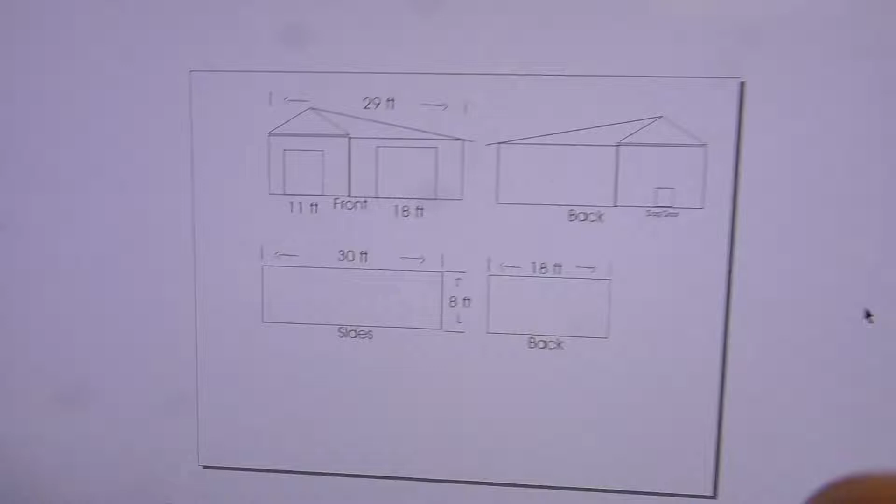I think I can make this look decent using the old shed as well. So basically, this is the old, and this would be the add-on.

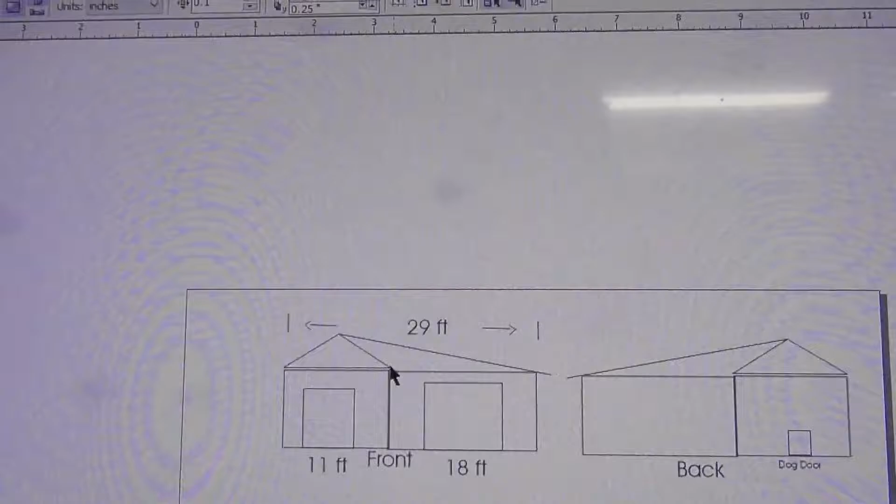I could come off the top of this roof and right across, and inside I'll have the 2x4s or 2x6s up here so that I can plywood it. But first I'm going to block this off right here, because I don't need heat going up into there and escaping. So I'll put a piece of lumber right up in there.

Let's undo that. Okay, so I'll put a piece of lumber there. Let's draw a line, going from here to there. So this will block anything from going up into there, which would just be wasted space.

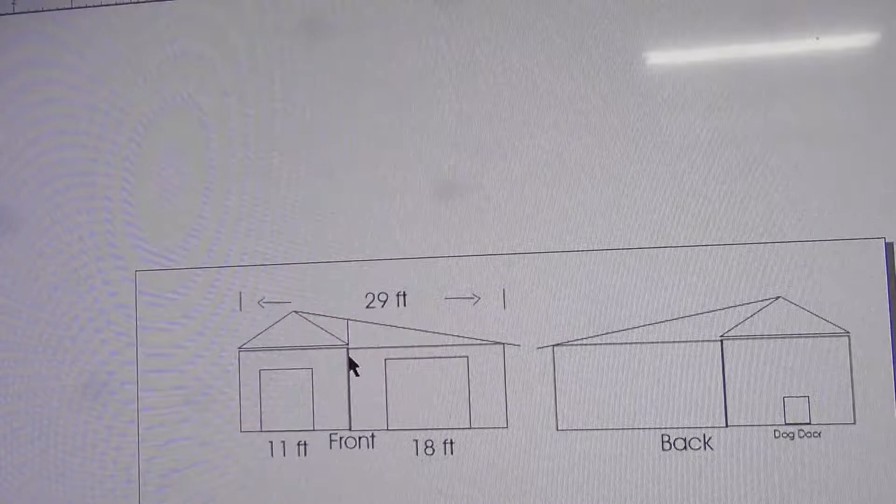I can put a couple pieces of plywood here, not to close it off completely, but to give me a place to put things up there if I need to.

This will be the front door, approximately 8 feet by 8 feet. This is the door that's there now in the old shed with the ramp, because I keep lumber in there. And this will be the back.

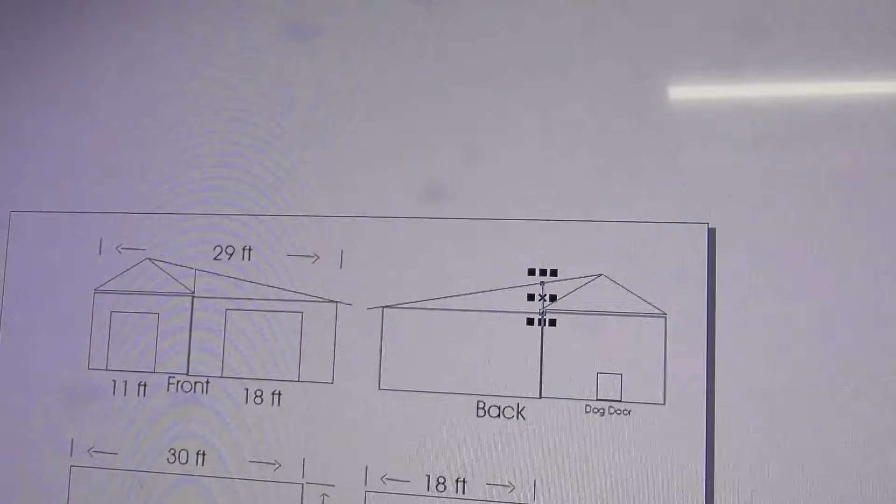Now I know because of the way this roof is that it looks like it's angled, but it's really not. This is the back. This would be the addition, and this is the old one.

This is the dog door back there, because they used to, and still do, run in through there and around and out the front. They use this as an in-out playground.

I think you guys have seen that before. I'll probably just leave that alone. There's no sense in rebuilding it, not unless I got extra lumber laying around. But other than that, that's kind of where we're at.

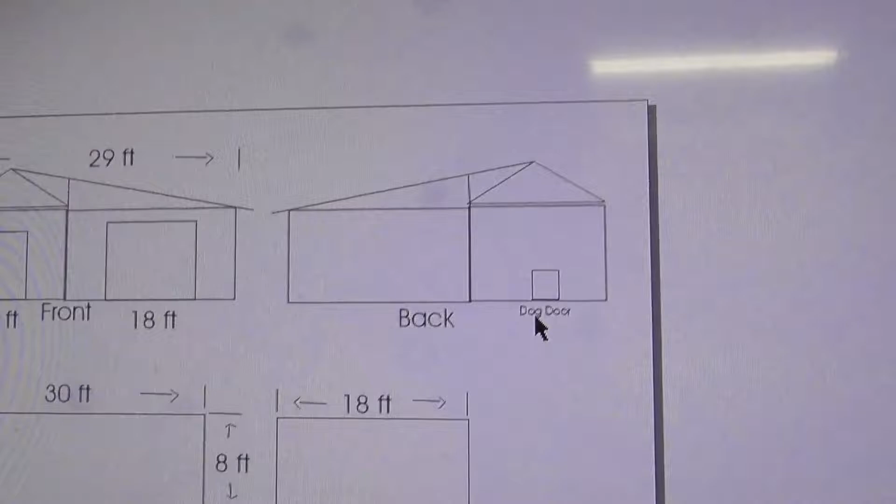So there's the back. The overall width is going to be 29 feet, and the overall depth will be 30 feet. So it's going to be 29 by 30.

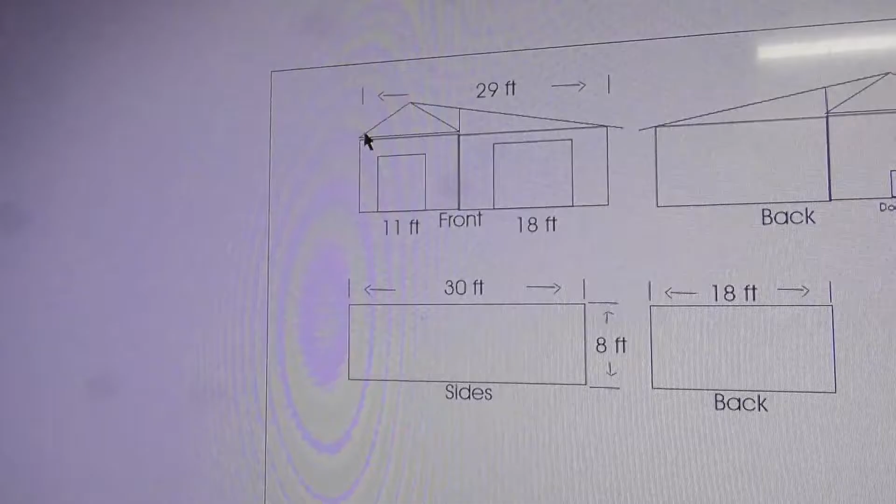But that's only on the new side. The 29 wide is the width of the whole thing, but the 30 is going to be the new side. The piece over here, the old one, is only about 15 to 16 feet long, so this one's going to be almost double that length.

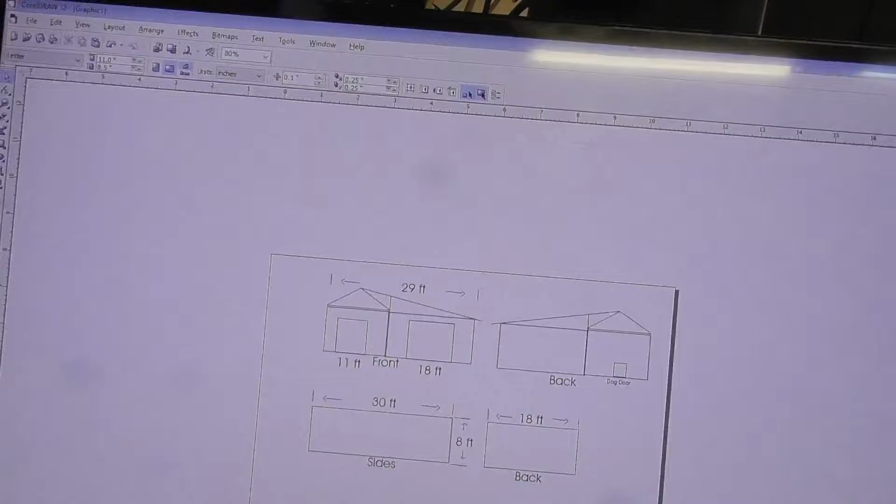So 30 feet's a lot of space, you know, so it's going to be a pretty good size back there. I just don't want it to look out of place, so I wanted to make sure that it looks like it belongs there.

So I'm probably going to have to side it with something. I can probably just put texture board up, you know, T1-11 around the outside, and have it look okay, and trim it to give it some look.

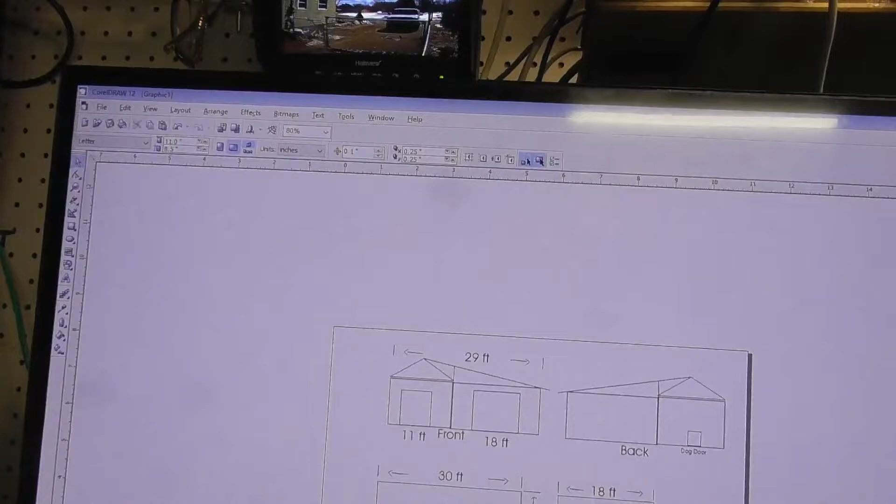Before I put the texture up though, I'll wrap it. See, I don't like, if I'm going to use texture, like for instance next door they put up texture board. I don't know if you'll be able to see it or not. I mean, it doesn't look bad, but this is the guy that's cheap, the guy that doesn't want to take care of his tree problems.

You can't see it, but right over there, there's a brown board, but that's like a little shed over there he built. It's probably 12 by 15 or so, 10 by 15, somewhere around that area. And they used the real thin texture look, texture 111 look, you know.

So it's texture 111, but it supposedly has a coating on it, so it protects the outside. However, it doesn't do much for the inside. It's basically still just pressed board, and as the moisture comes up, it's going to rot it anyway, but that's him.

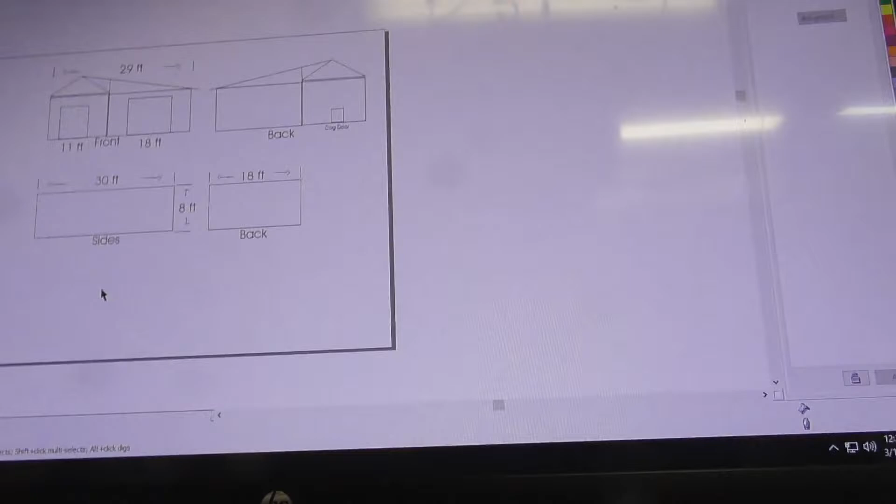I'd like to see this last a couple years. I don't want to be out there fixing it every time a winter comes along. So I'll put up an inner board, something like what I have in here, which is still nothing that I really care to use, but for what I'm doing, this stuff here.

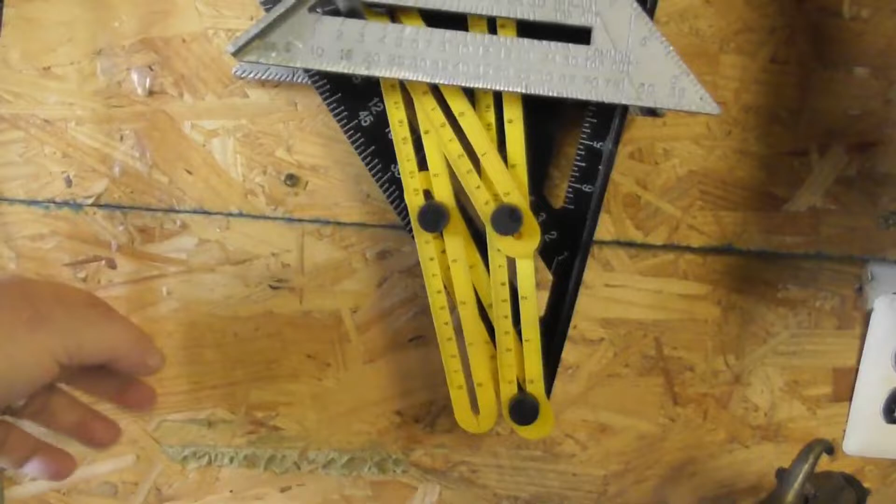Like for instance on the roof here, I use plywood. I'd like to use plywood all the way around, but seeing that I'm going to wrap it, and I'm going to have texture 111, I'm sorry, and pressure treated on the bottom.

What I can do is just seal the crap out of the bottom and then wrap it, and then I can use that inexpensive texture 111 board, or just buy the good texture 111, put it up and paint it or stain it, which is another option. So I have to kind of see which is going to be best.

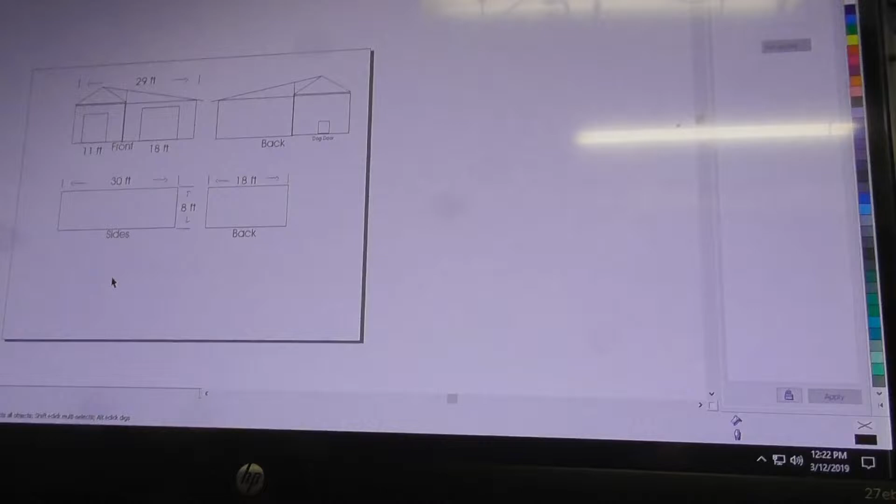Wrapping it will help hold the heat in, and I have the wrap, but again, seeing that it's not going to be a full-time thing, it isn't something that I really have to concern myself with. But that's where we're at so far, so we'll see what happens.

I'm going to go on Home Depot's website real quick and see what some of these prices are, and that'll determine if I want to use a double wall, meaning this particle board stuff first, then wrap it, and then put that cheaper texture 111 board up with the finish on it, or do I just want to put up a good texture 111 and paint it or stain it and leave it at that.

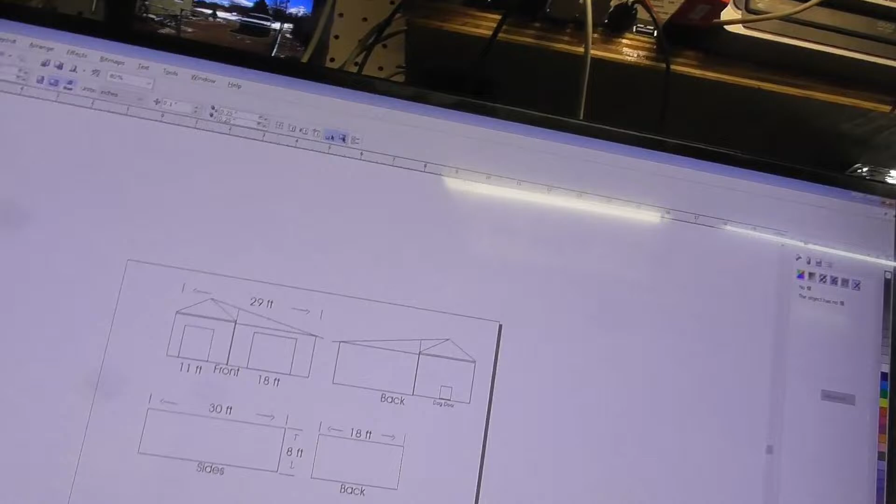Now I can still throw some wrapping up on the studs before I put the 111 up, so that'll help with that a little bit. We'll see, we'll take it one step at a time.

So let me get some prices. I'm first going to print this out so I have an idea, because then I still have to figure out what I'm going to do stud wise.

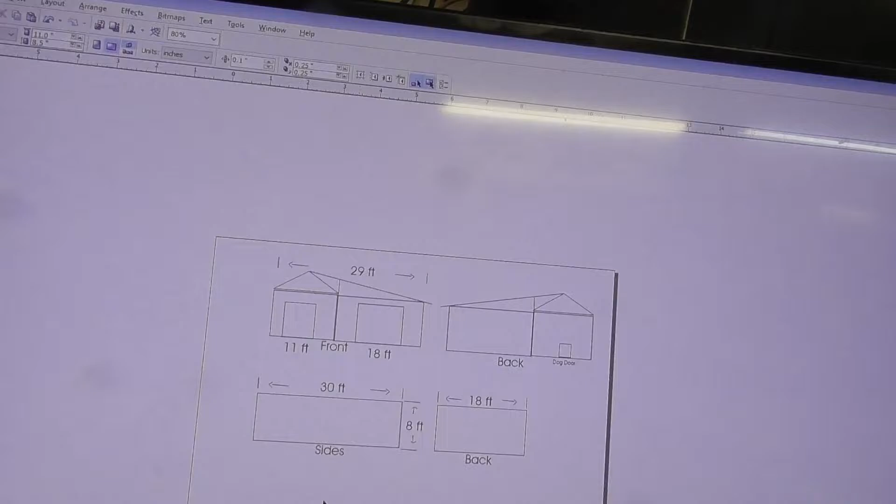I'm probably going to go 16 on center. It gives me more to work with. It'll give me more support when I start putting up the 4x8 sheets of whatever it is I'm going to use, and more to work with inside if I want to hang shelves. 16 on center with the 2x4s should give me more than enough strength all the way around for what I'm doing here, so I shouldn't have to worry about it.

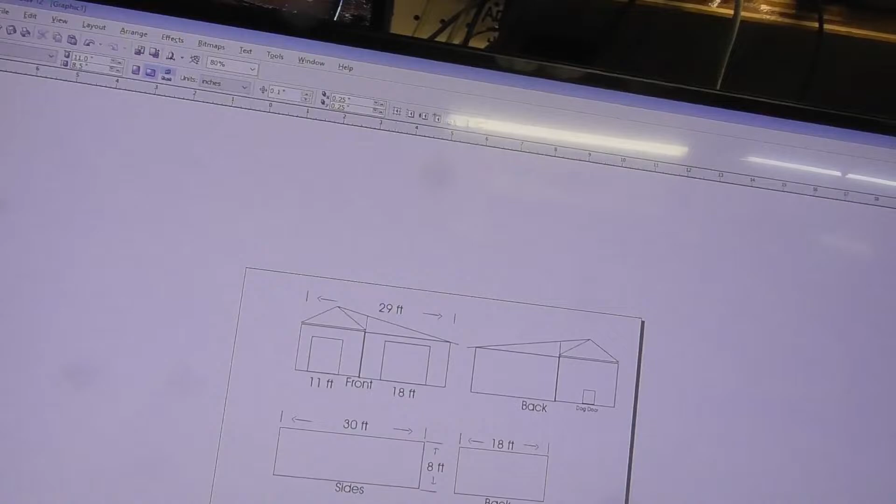If I was building something to live in, I would go 16 on center with 2x6s. But seeing that it's just going to be there, I think I'll be fine with what I'm going to use. So I got to figure out what I need as far as how much of it as well. Alright, I'll be back.